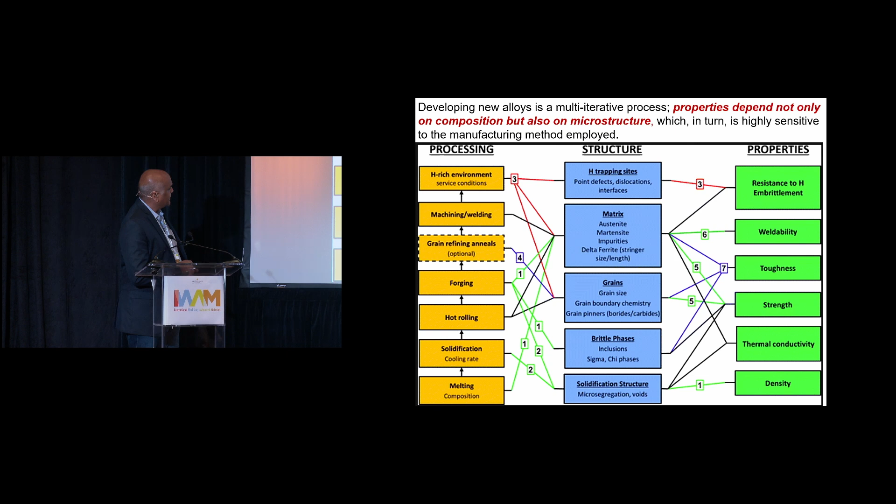For most of the engineering structures, mechanical performance is generally the key indicator when you design a car, aeroplane, a rocket, a nuclear reactor. And they depend on this microstructure.

So as metallurgical engineers, we want to play God with the microstructure. We want to be able to determine what kind of microstructures come, because microstructure is what determines the properties, and the processing routes essentially determine the microstructure. This is something that, as a background, you have to remember.

Now this is where it gets complicated. So I just talked about processing, structure, and properties. And often it's not just one property - you are talking about strength, toughness, weldability, corrosion resistance, etc. And density, and the most important of all, availability and cost.

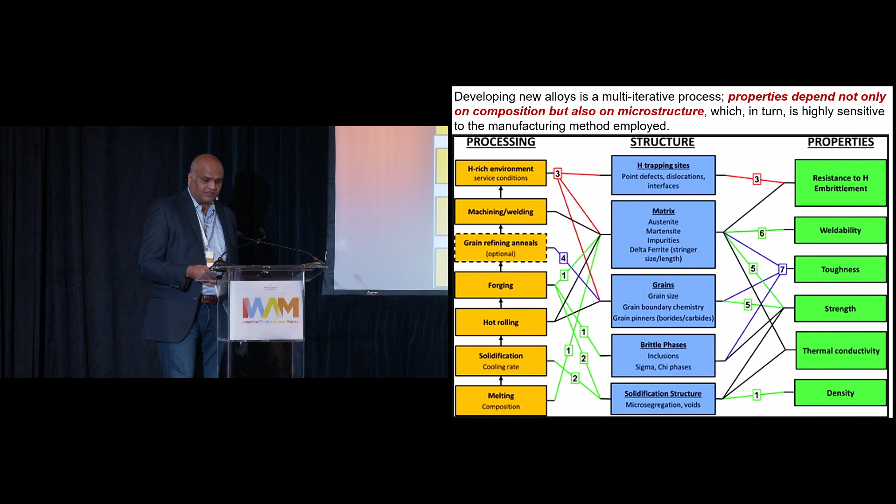So you change a little bit in the processing conditions, and the microstructural features can change dramatically, as these things show, and as a result properties change. So unless you have a very good understanding of all these connections, you can't really have an engineering alloy that is useful for you in the truest sense of the word.

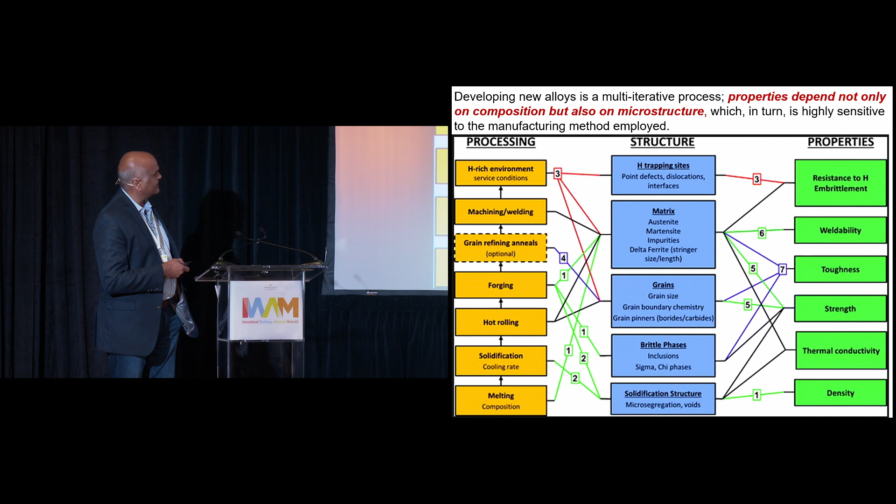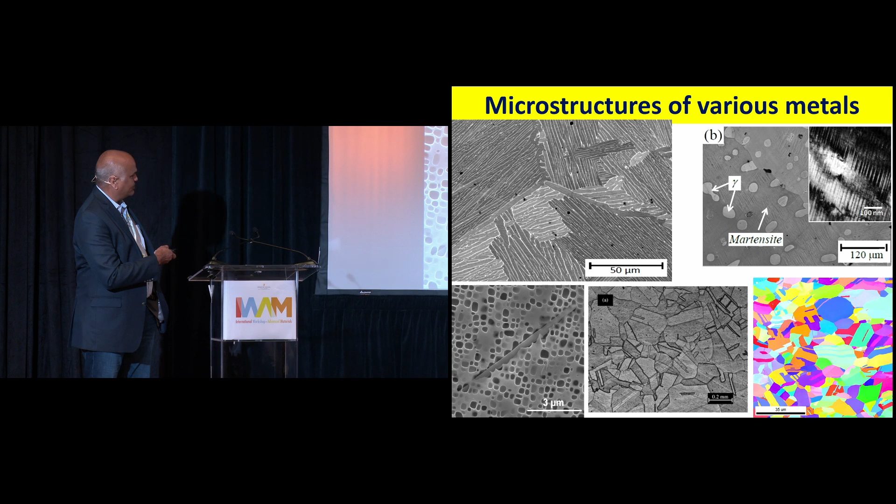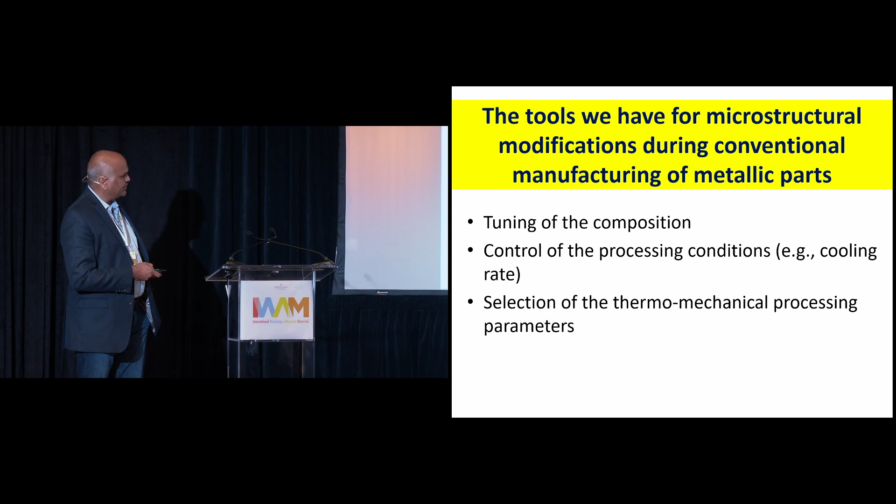And then the most common way is basically what metallurgy is all said and done - heat and beat technology, from 3,000 or 4,000 years. We heat the metal and we beat it to get the shape. So thermomechanical processing is one way to control the microstructure, and that allows us to...

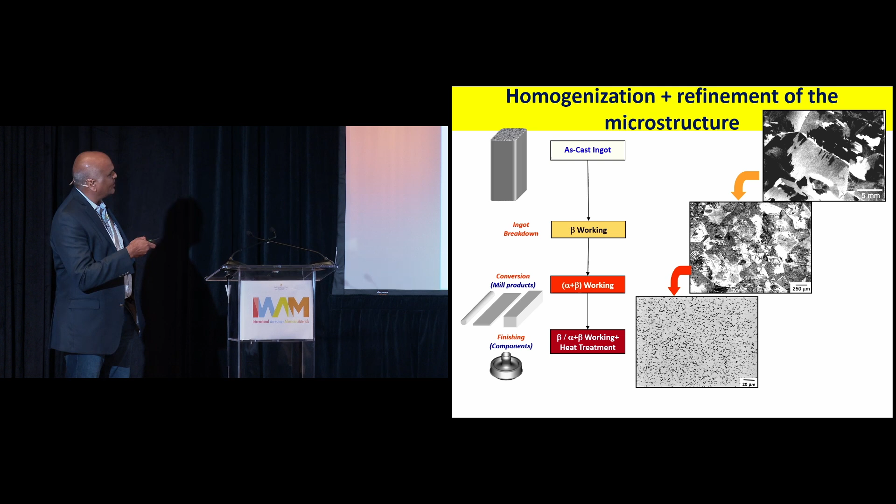...refine the microstructure. So this is a 5 millimeter scale, and this is a 20 micron scale. You can see that as you go through the thermomechanical processing for a titanium alloy, you can actually refine the microstructure and homogenize it. This is something to remember.

Now, so that's how conventional metal manufacturing works. But most people are now interested in additive manufacturing. Conventional manufacturing is you make a big casting, and reduce the size to make whatever needle or disc or whatever you want. In 3D printing of metals, we basically build bottom up - we build a voxel at a time, like nature does.

So for metal 3D printing, you basically need an energy source because metals are high melting point materials. We take typically powders or wires, and then we melt them at a specific location. These are basically powder bed fusion - you spread the powder with a predetermined thickness, 30 microns, 60 microns, and then you take a laser and shine on it to melt it.

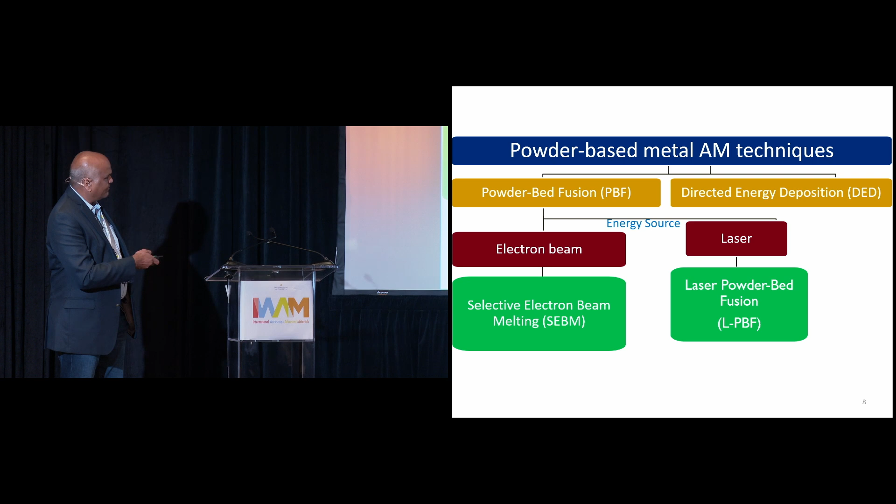There is another method called directed energy deposition. Most of the talk, we deal with a number of different 3D printing techniques, but most of my talk will be on this laser powder bed fusion technique.

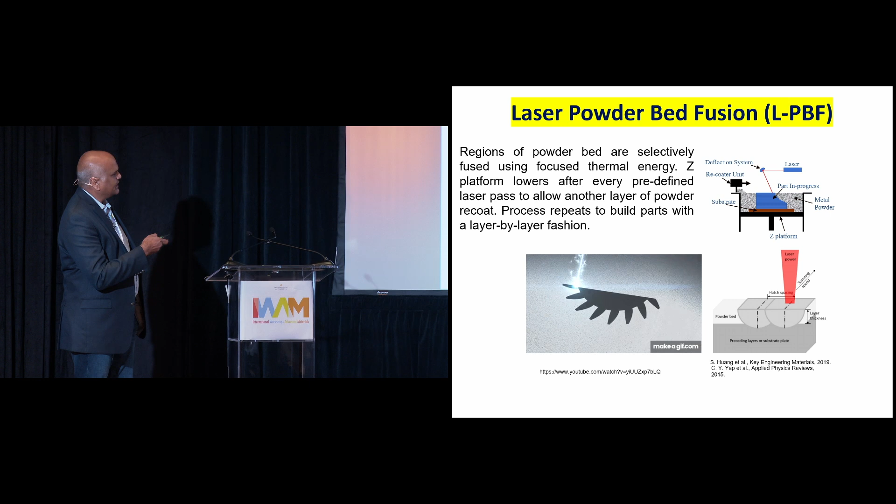Here it is very quickly. So what you do is you basically spread a layer of powder, then shine a laser on it to melt wherever your specific locations, and you keep building from bottom up to get the 3D product you want. The physics of this problem is quite complex. You have all three heat transfer mechanisms operational, and then you have phase changes - not like my previous speaker talked about, from amorphous to crystalline, but melting to solidification - and there is also some evaporation possible.

And because of the laser beam doing this, you also have fluid dynamics coming into play. It's quite a complex process as you melt a voxel at a time and keep moving the laser beam. The key parameters are growth rate, thermal gradient, and undercooling. That is the thing - next few slides I will walk you through.

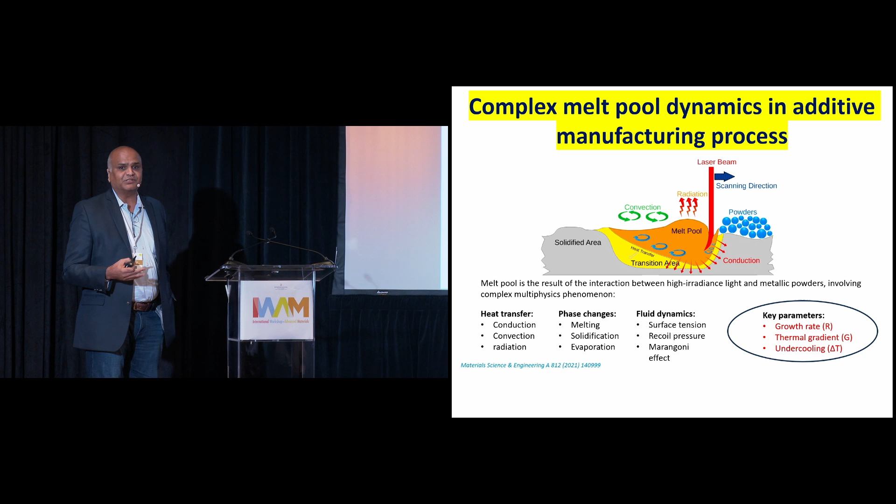I know that I'm standing between you and your lunch, so I'll try to accelerate. So the growth rate and thermal gradient directions can affect these things.

For example, here you see the very fine grains - this is a single melt, single track. But if you build on this, you can see the microstructure, the grain structure, is very fine, whereas on the outside it's much coarser. So if you build several of these layers, you see very complicated microstructures coming into play.

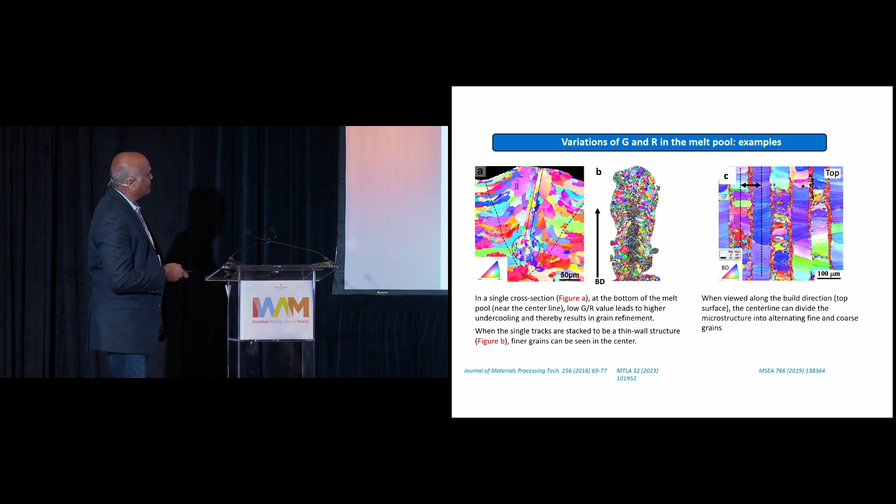When you 3D print a metallic material using the laser powder bed fusion technique, you get a hierarchical microstructure - hierarchical structure features. At the sub-micron scale you have cellular structures, and if you do TEM on it, you get very high dislocation density decorating the cell walls. From few to tens of microns, you get very complicated grain structures. At a much larger scale, you have meso-structures, often hundreds of microns in scale. So you have these features, and all of them could influence your mechanical response, and I will try to illustrate that.

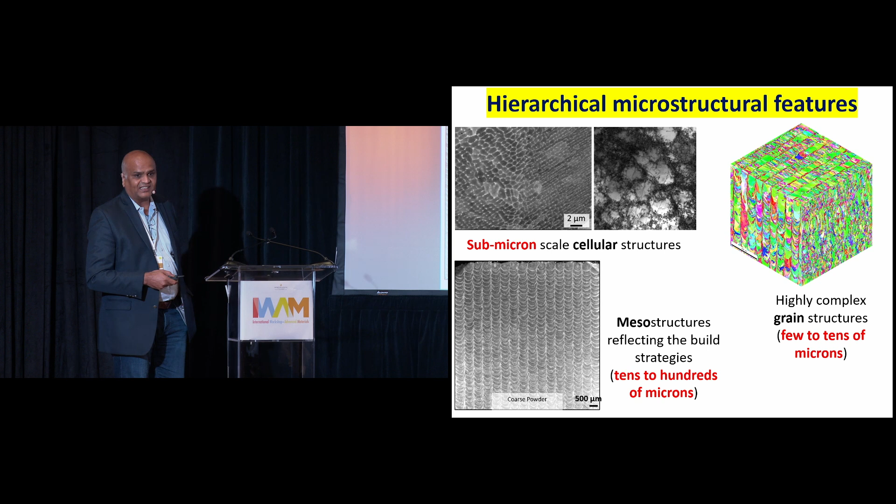One of the most common features is this cellular structure. If you look transverse to the build direction, you see these cellular structures, and if you look along the build direction, they are all aligned - the misalignment between them is very nominal. So these are basically solidification cells, and what happens is...

These are four different FCC, face-centered cubic, alloys, and you see cellular structures in all of them. But the length scales, for example depending on if you do laser powder bed fusion, are about sub-micron in scale - 0.63 microns, etc. But if you take the same austenitic stainless steel, a very common widely-used stainless steel, and use a different manufacturing technique called directed energy deposition, you get a much larger cellular structure that is now about 6 microns - an order of magnitude increase in the cellular size.

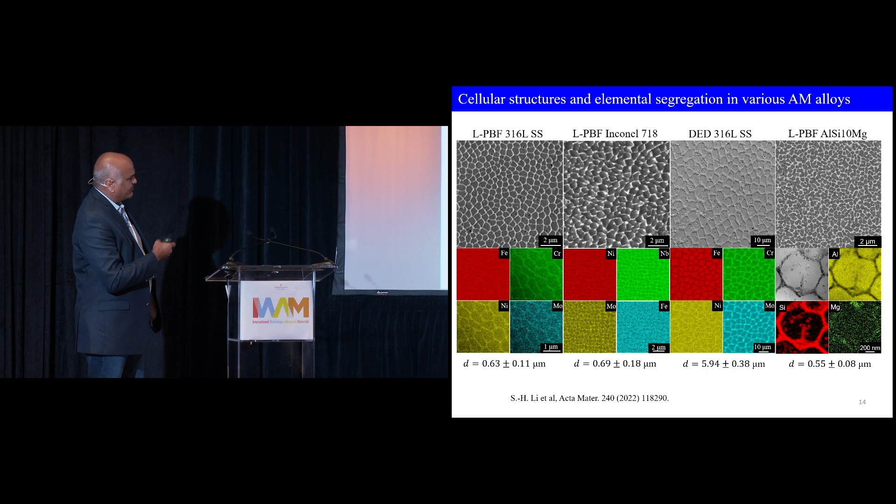There is elemental segregation, as these maps show, to the cell boundaries - solutes segregate to the boundaries. And if you zoom in and look at it in a microscope, you will see a very large dislocation density decorating these cell boundaries.

Now why does this happen? Why do you have these cell dislocations happening a lot? What you're doing is, at any given point in time, you're scanning one line, and then you come overlapping another line. So the already-solidified material undergoes a serious thermal heating and cooling, thermomechanical cycle - because it's mechanical as well, since it's already stuck to the substrate. And then you come and deposit another layer.

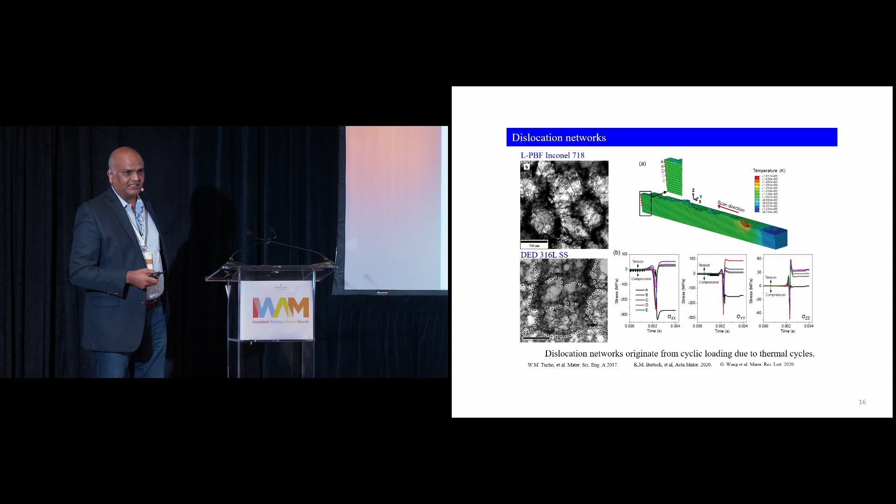In conventional manufactured metal this doesn't happen - it's all cooled at the same time. Here, you're repeatedly heating and cooling it, and because of that there is quite a lot of stretching and contraction. It's like fatigue - not conventional fatigue that you think of. As a result, these simulations show fairly substantial thermal cycles, so you get fairly large dislocation debris accumulating, and these dislocations decorate the cell walls.

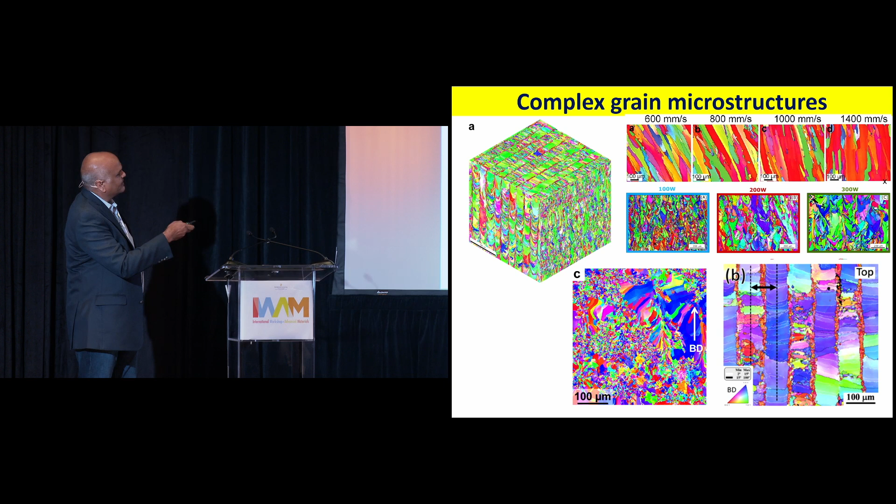Okay, now that is about the cell structure, and if you zoom out to a slightly different, larger scale, you see very complex microstructures. These are difficult to understand. I showed you earlier a structure like this. Depending on your scanning rate, you can see the grains tilting more into vertical direction, depending on the power you use. These are not easy to interpret, even for metallurgists well versed with this. You can see these kinds of structures where the grains seem completely inhomogeneous.

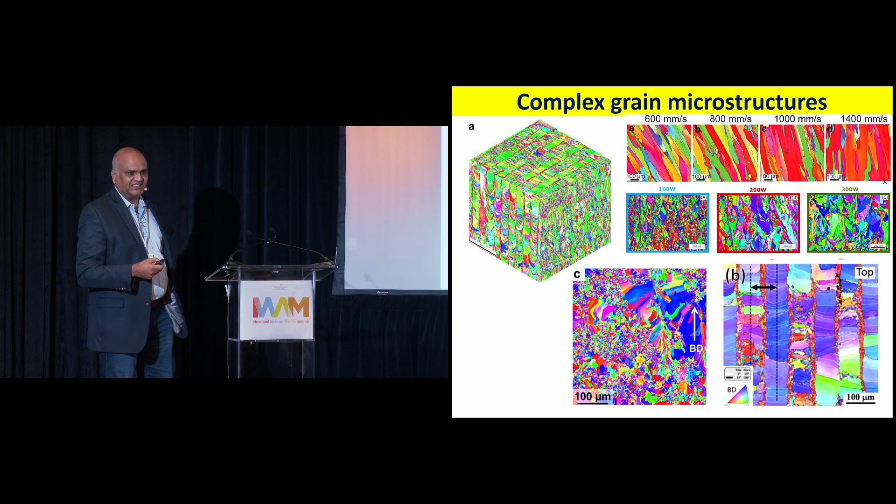At least you can see that there are a lot of, for example, if you add particles to this powder, we add nucleation things like carbides and ceramic particles, then you can actually force what we call columnar to equiaxed transition. Let me illustrate that with this particular example.

This is where we take iron and add aluminum to it. Our idea was that aluminum is lighter, so we want lighter steels. If you take pure iron, this shows all 001 orientation, all red, meaning highly textured grains. As you add more aluminum, you are essentially forcing columnar to equiaxed transition and finer grain size. So these are the things that are possible.

The last one, this is not our work, I think it's from colleagues in Australia. If you switch on ultrasound, you get very fine grains, but when you switch it off, it again gets into a coarse structure.

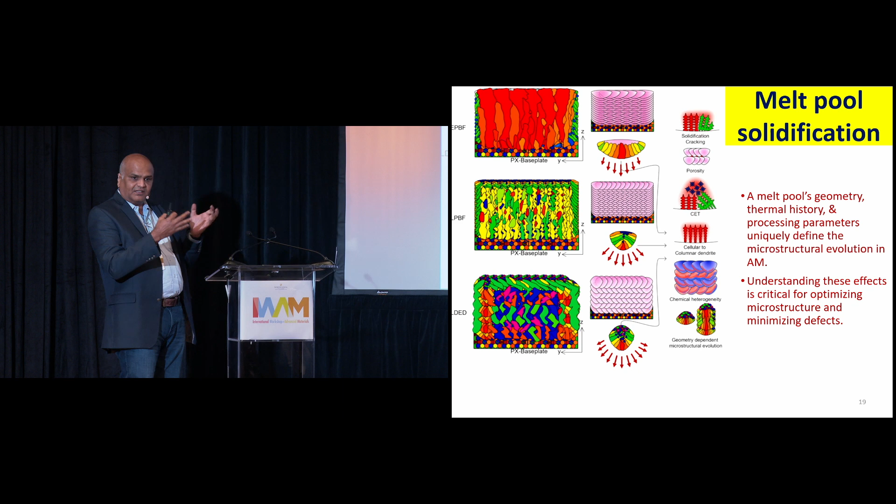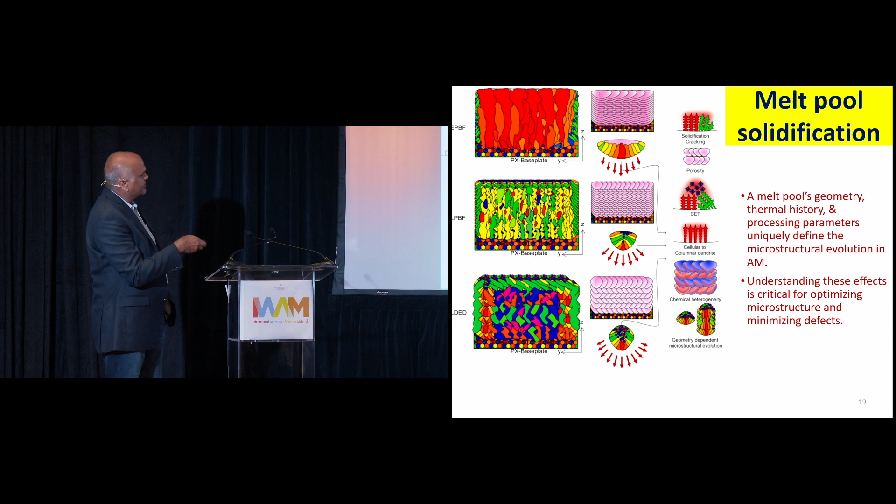So the melt pool, at any given instance, determines the solidification characteristics, which determine the kind of microstructure you get, as illustrated with these examples. Whether it's a shallow one, as in electron beam powder bed fusion, versus LPBF where it's not so shallow, and DED which is much larger scale, it changes the microstructural characteristics. We just wrote a nice review on this very topic.

That just tells you the kind of microstructures that are possible. There are submicron scale, micron scale, and mesoscale microstructural features, and they all will obviously influence the mechanical properties.

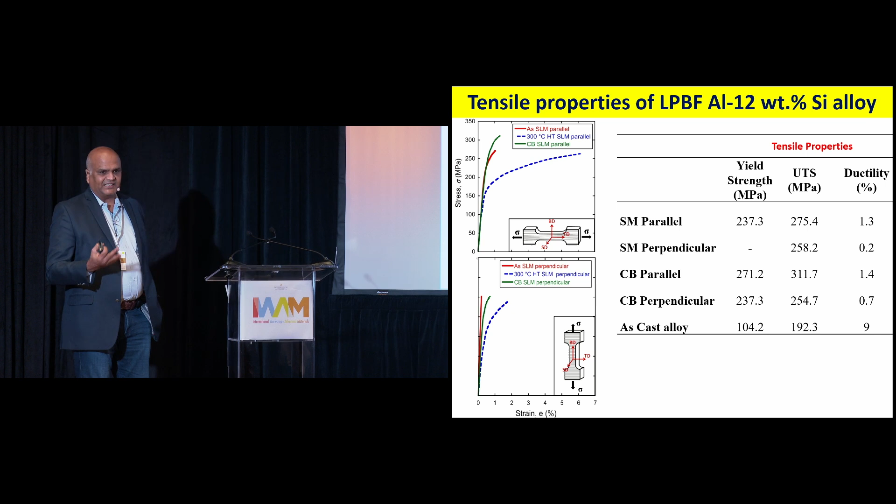So we take one of these alloys. If you look at car engines, most of these are aluminum-silicon alloys near eutectic composition. If you take this alloy and just use casting, the yield strength will be about 100 MPa, tensile strength about 200 MPa, with reasonable ductility of about 10%. The same alloy, if you make powder and 3D print it using laser powder bed fusion, you'll notice the strength has more than doubled, from 100 to 200 plus. The UTS has also gone up, but the ductility has really tanked, gone very, very bad. So the strength goes up when you 3D print an alloy, but the ductility comes down.

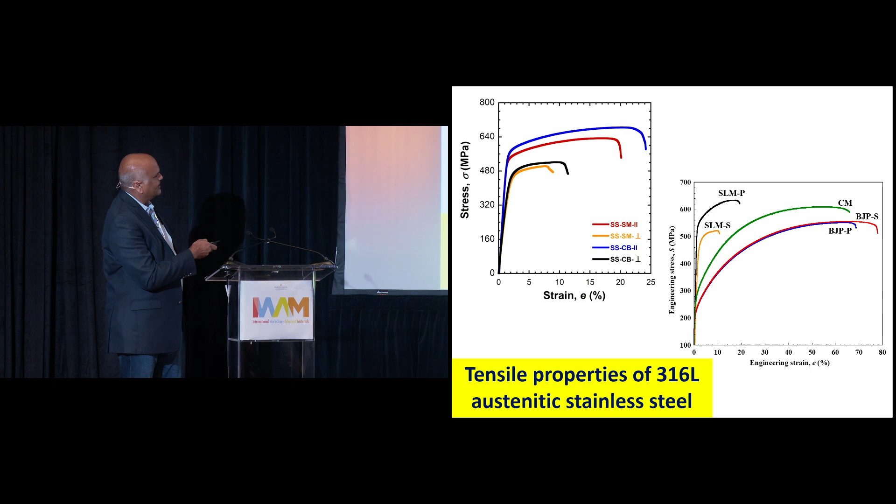That's the thing — this is also true for 316L, an austenitic stainless steel. This conventionally manufactured alloy is fairly ductile, but if you do laser powder bed fusion, the strength increases while ductility decreases. This is a general observation for most 3D printed alloys compared to their conventionally manufactured counterparts: strength goes up, ductility decreases.

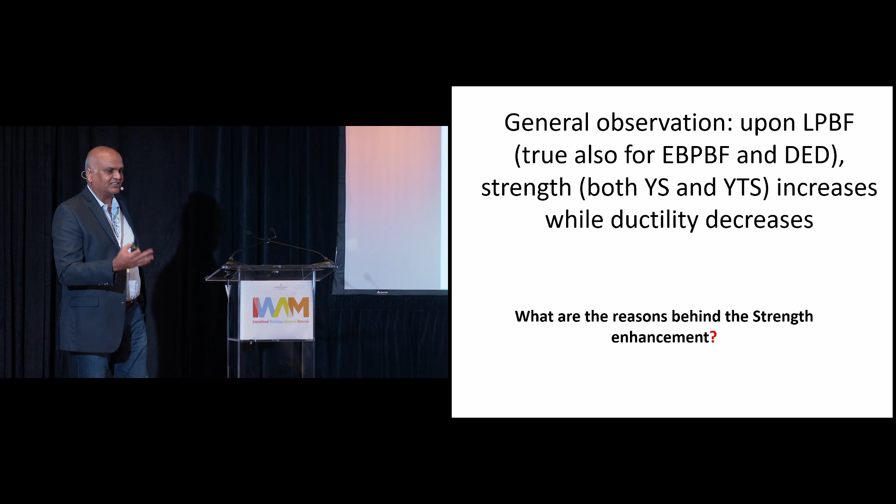What are the reasons behind this? I already talked about the cellular structure. So one can say the length scale that determines the yield strength in the material is no longer the grain size, but the cell size.

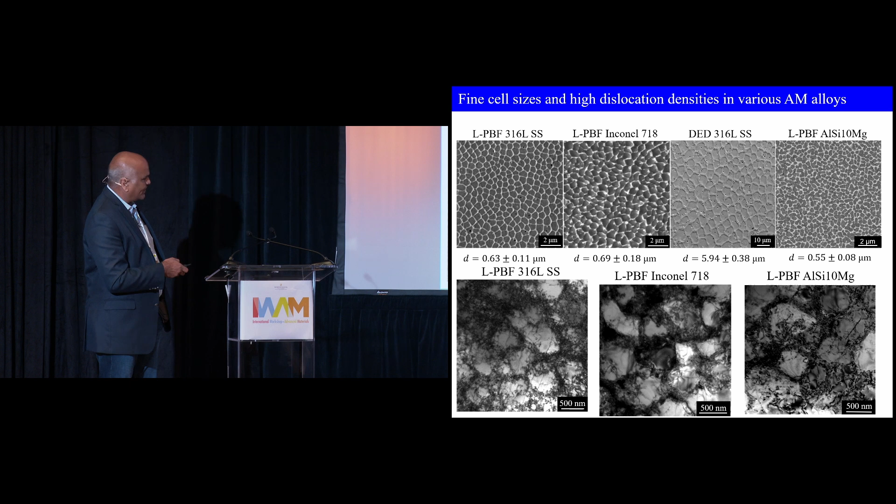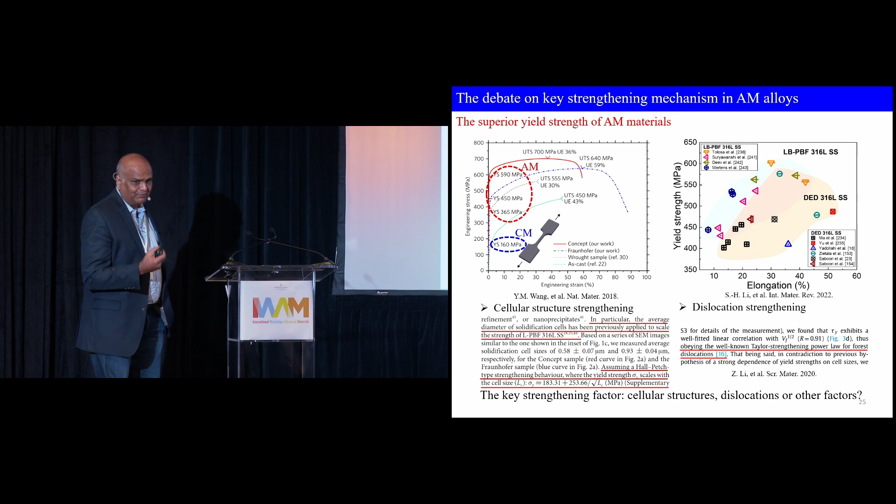And you have also a large number of dislocations, right? So there are two theories or hypotheses. One says, okay, because you have this Hall-Petch relationship. Any of you who studied material science, Callister's book, this is the first thing you learn. The finer the grain size, the higher the strength, because the grain boundaries act as barriers for dislocation motion. They do other things, as Stephen showed, but here also, in terms of strength, they are very critical.

So this is the grain Hall-Petch relationship here, and Wang et al. say that instead of the grain size, you fit in the cellular size. The other school of thought says, no, you have a very large number of dislocations, and dislocations are the ones which basically hinder plasticity, and that's why you get the high strength.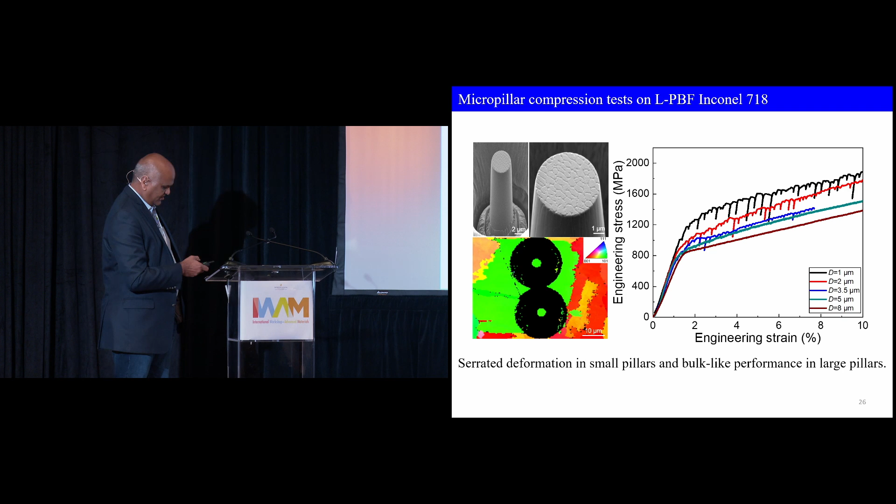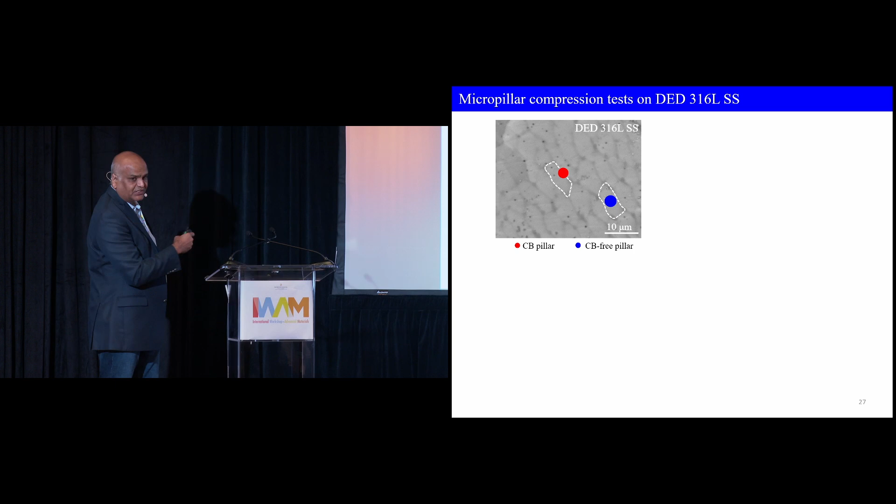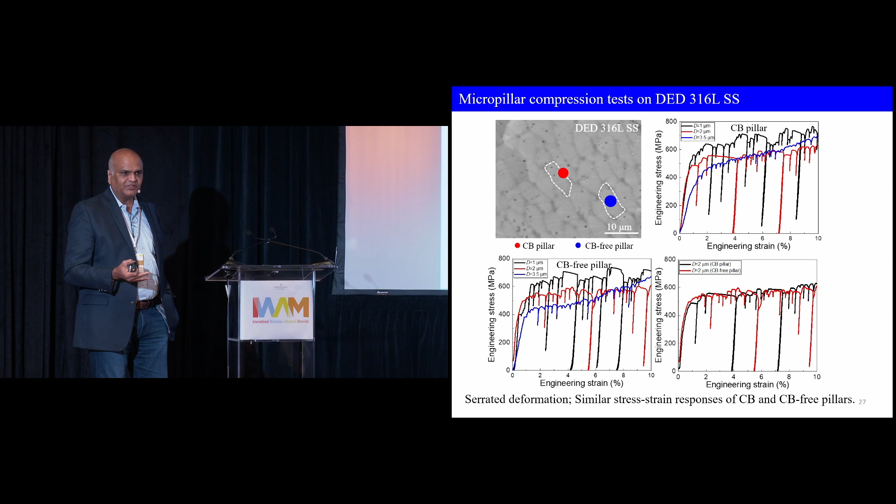We could actually machine out pillars with or without the cellular structure, because in the directed energy deposition case, we have a fairly large cell size. We can have a pillar with a cell boundary in between, or a pillar without any boundary. So we can have a direct comparison, and here is the comparison, the last one. They're both 2 micron pillars, and there is no difference. So whether you have a cell boundary or not doesn't seem to be affecting the property.

And we did it for aluminum silicon as well. I skipped this - in this case, there is no size effect, no smaller-is-stronger response.

So we did this for a lot of different materials, and this is a summary plot, if you will. Here, what we do is we take the yield strength that we measure. For those of you who are not familiar, yield strength is when we have the elastic to plastic transition, the stress required to initiate plastic deformation in a metal.

Now, we normalize that with the bulk value, taking a very large specimen and measuring that. On this axis, we normalize the pillar diameter - capital D is the pillar diameter - with the cell or grain size. If you have conventionally manufactured metals, microcrystalline or nanocrystalline, what you will see is that as the pillar diameter gets smaller and smaller, it gets weaker. Smaller is weaker. But in 3D printed metals, it's smaller is stronger. You can see in all of the cases, it's mostly smaller is stronger, okay?

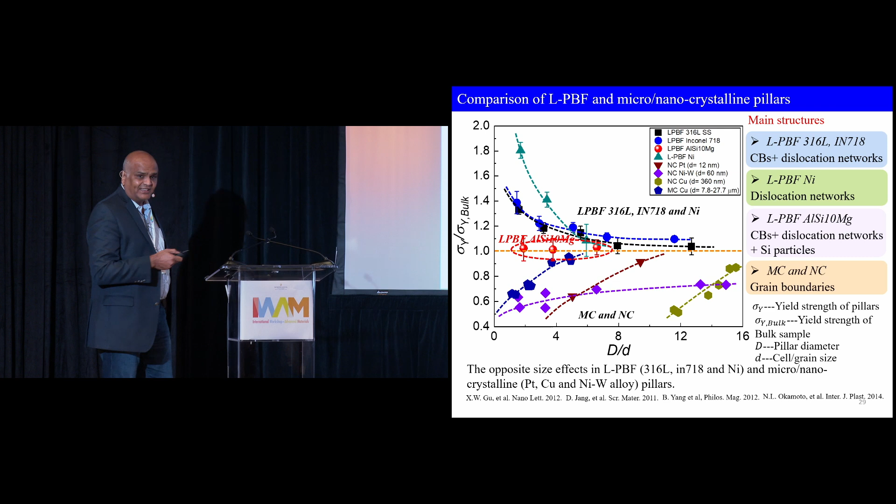So why does this happen, okay? I actually put this slide after listening to our chair's talk the other day. F.C. Frank is what he mentioned. He was at Bristol physics department.

First thing to understand is how dislocations multiply. They do multiply dramatically. If you take a well-grown metallic crystal and you squeeze it a bit, deform it, they go up by 6 orders of magnitude. Dislocations multiply, and very early on, condensed matter physicists wondered why this happened.

So Frank came up - this is a fascinating story itself - that Frank and Read came up with this idea on the same day, roughly the same time, in different places. Check out the Wikipedia rabbit hole on this, it's very fascinating. They met the next week and then decided to write a paper together.

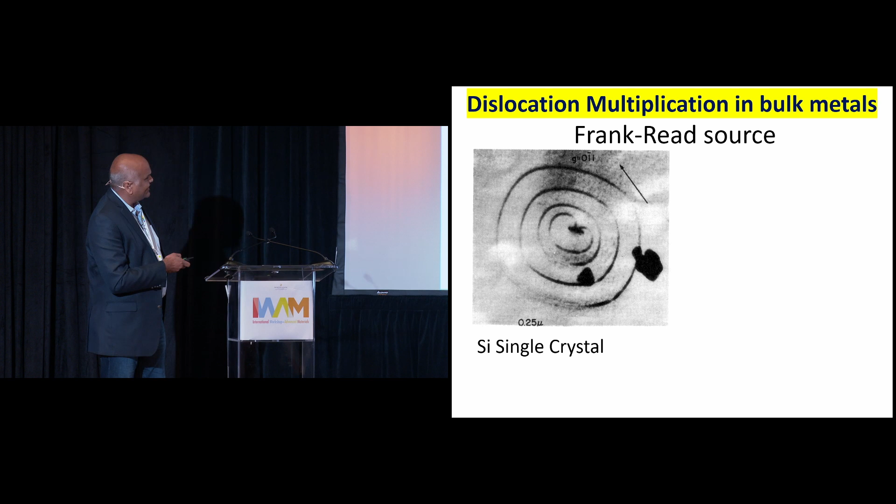So the Frank-Read source basically is: if you have a dislocation line like this, if it's pinned on 2 ends - or it doesn't need to be pinned, but it can have only shear stress on this particular segment - what happens is once you apply stress, it bows out, and after a while it becomes unstable and punches out a dislocation. And this is what you can actually see in this demonstration, right?

So those from Cambridge, materials department, will recognize this with the DoITPoMS thing. Bill Clyne started it.

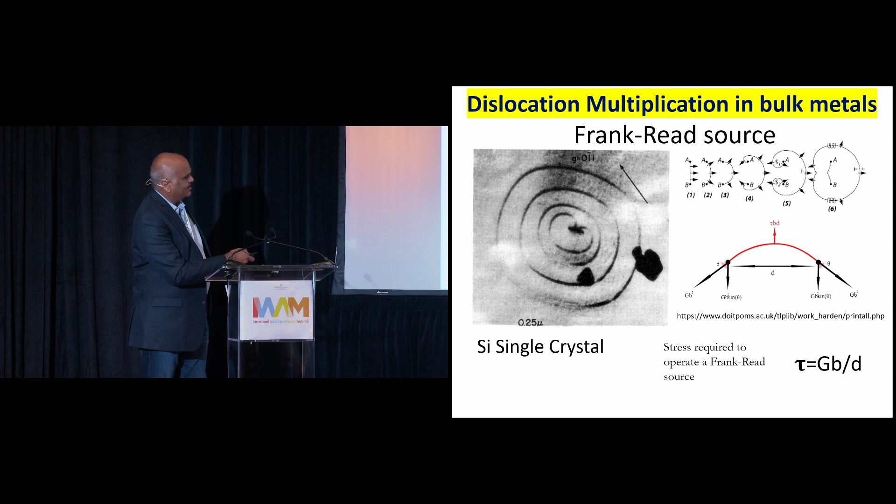So the stress required to operate a Frank-Read source basically inversely scales with the distance, the length of it, Gb by d. Now, so what happens when you go to smaller and smaller diameter pillars is that it's not the full length, so you have what we call single arm sources. This is anchored at the surface - the single arm source, whereas this is the Frank-Read source. So when the average length of the Frank-Read source is much smaller, you need to apply higher stress for them to get active, and that's why the yield strength goes up.

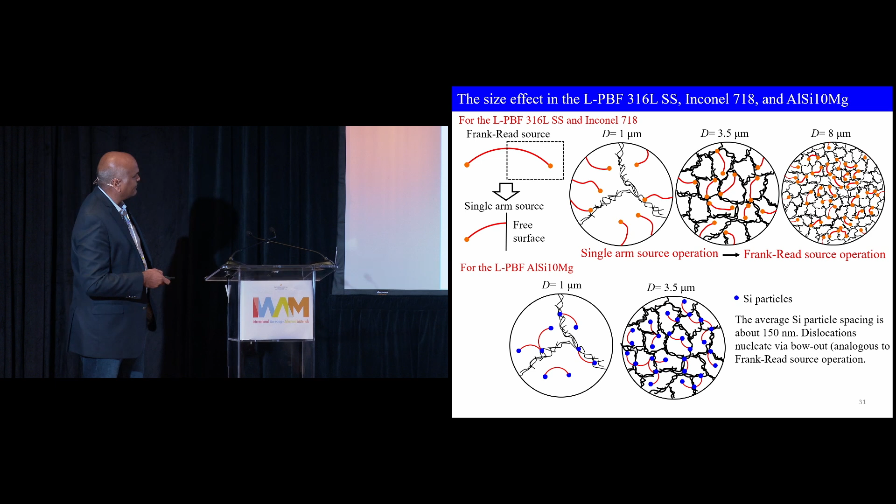So when you go to larger and larger diameter pillars, you obviously don't have these single arm sources, but the Frank-Read sources themselves become dominant, and that's why you get bulk-like properties. In the aluminum silicon case, we have particles - silicon solubility in aluminum is very negligible, so it all precipitates out as nanoparticles. That's why even if you go to 1 micron, you get the bulk strength.

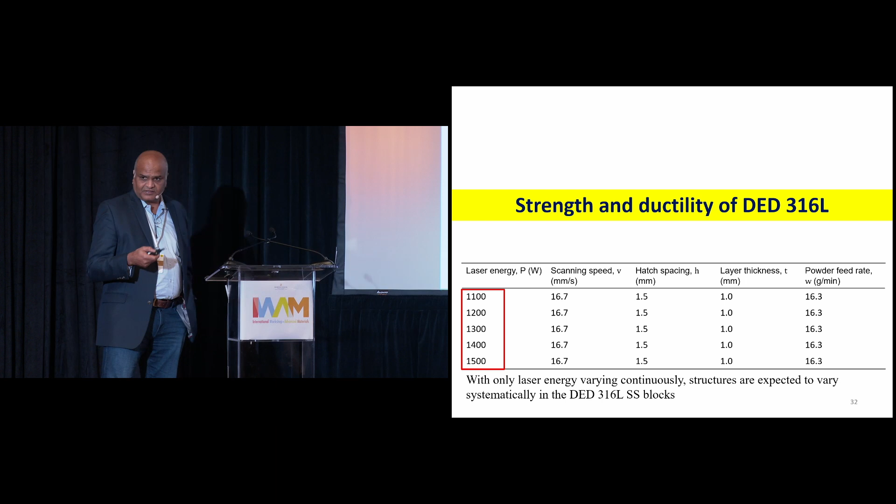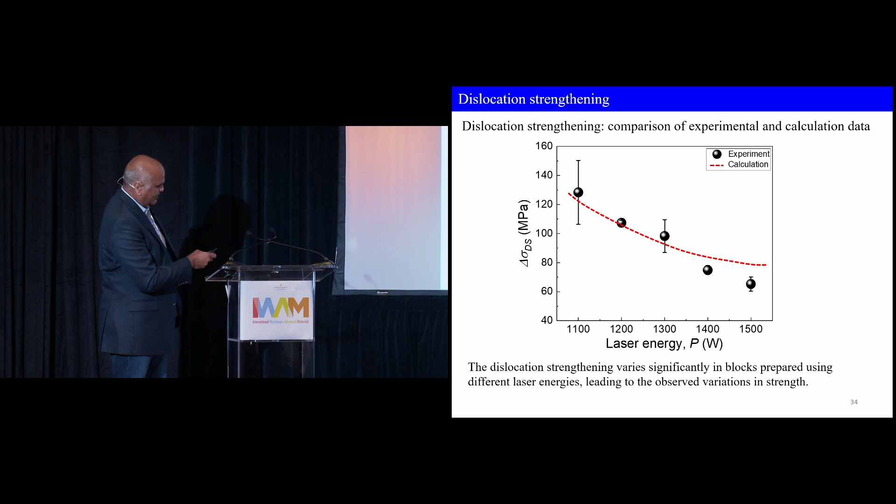Now, what is the reason that you get high strength? Not the cellular structures - we did systematic experiments where we can vary these characteristics very systematically, and what we show is that it's all because of the dislocation density. You have the cellular structures, but you also have very high dislocation density in this material, in the as-fabricated state, just because it's going through thermomechanical cycling. This is from Taylor's calculation, and we show that we know the dislocation density.

That is what I flashed in the previous slide, and we show that the additional strength actually comes from the large dislocation density. Now, early on, I summarized that when you 3D print a metal, the strength goes up. In metallic materials context, it's true that you can't have the cake and eat it too - so when your strength goes up, you have to give up something. The trade-off that you do is with ductility. So the strength goes up, ductility comes down. Why does it happen? Because of the same dislocation.

I told you that there is a large dislocation density in the material, and that increases the strength. But it's like a reservoir - metal can only accommodate so many dislocations, it can't accommodate more. Because of the way you manufactured it, you already stored a lot of dislocations, so the further number of dislocations you can add on to it is smaller. And that's why the work hardening ability - I'm sorry, it's a little more technical for this audience - but work hardening ability decreases.

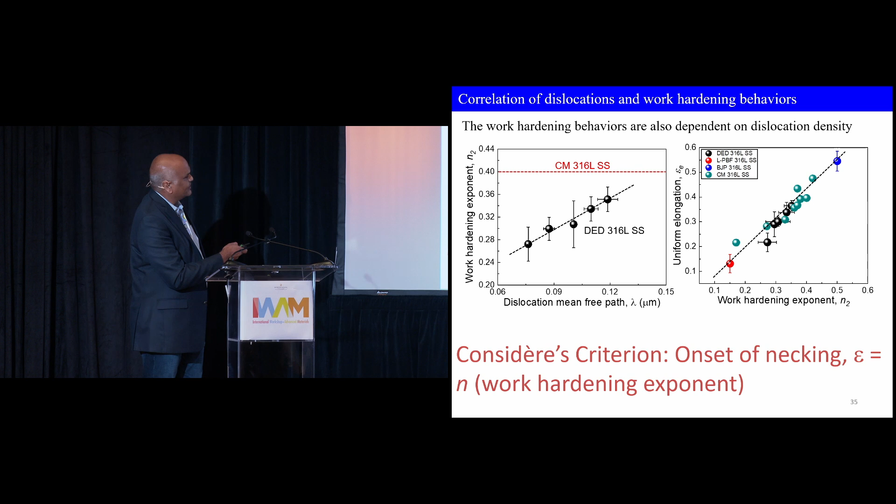This is actually a Considère's criterion that we teach. So as the work hardening exponent decreases, the uniform elongation - which is the ductility of the material - reduces. So this is what it tells you: the way you manufacture changes the whole game. The microstructures change, the dislocation densities change, and they alter both strength and ductility as we saw.

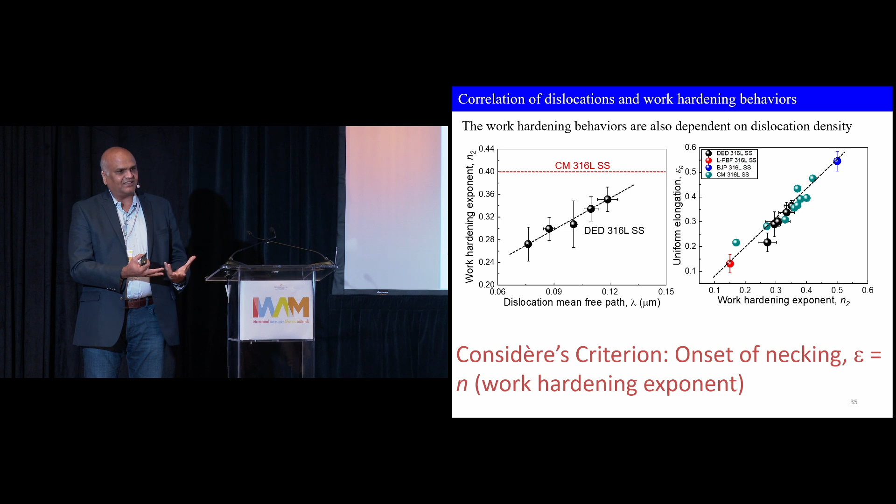Okay, move on to fracture behavior of these materials. I talked about ductility and strength trade-off - it's really the fracture toughness and strength trade-off. So you need, for an engineering application, both these characteristics to be very good, especially fracture toughness. When you design a critical component, meaning a component that should not fail - why is it critical? If you think of an aeroplane, no part of it should fail without telling you.

That's very bad news. Somebody told this: what excites scientists, pure science people, is that when they discover something unexpected - the classic case is the Eureka moment of Archimedes. What excites engineers is that everything should work as you predicted them to be. So if an aeroplane takes off in Dubai, travels 12 hours to New York, it should land safely and immediately turn back, and whatnot.

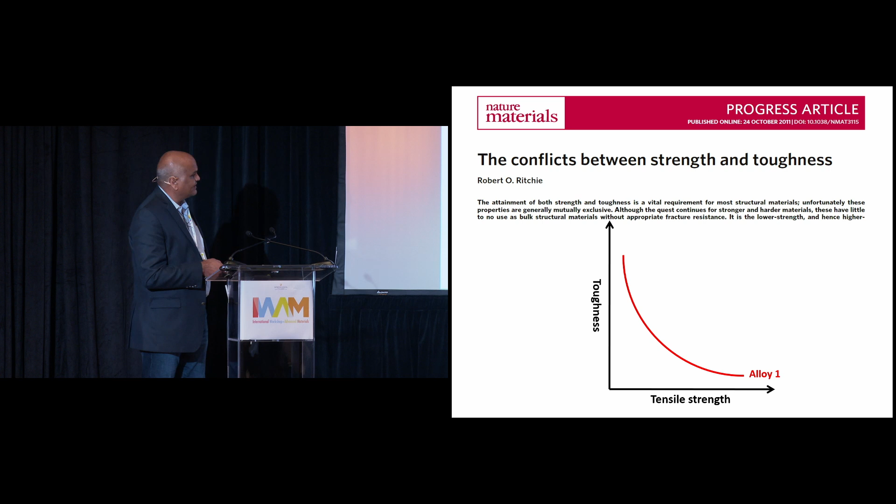So for that, engineering components should have damage tolerance. Any damage created during service should be tolerable, so that we do periodic inspections and remove them. For that, you need fracture toughness and resistance to fracture. That's why we don't use ceramic materials in structural components, because they don't have toughness. They have high strength and other properties, but unfortunately, toughness and strength go in opposite directions, as just illustrated here. Rob Ritchie wrote about this long ago.

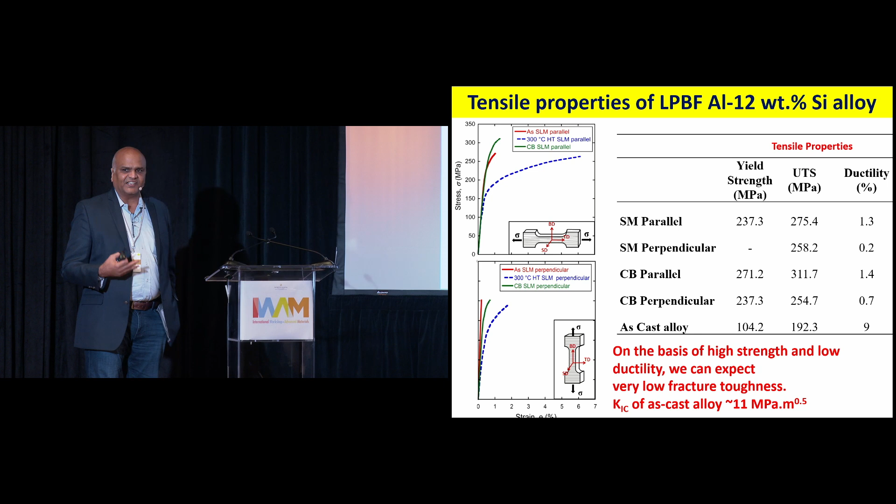All right, so remember this slide? I told you aluminum silicon, when we 3D print it, the strength goes up. And I also told you that ductility decreases, and ductility and fracture toughness are generally correlated in a linear manner. So we were expecting that fracture toughness of this alloy would be disastrous, very, very bad.

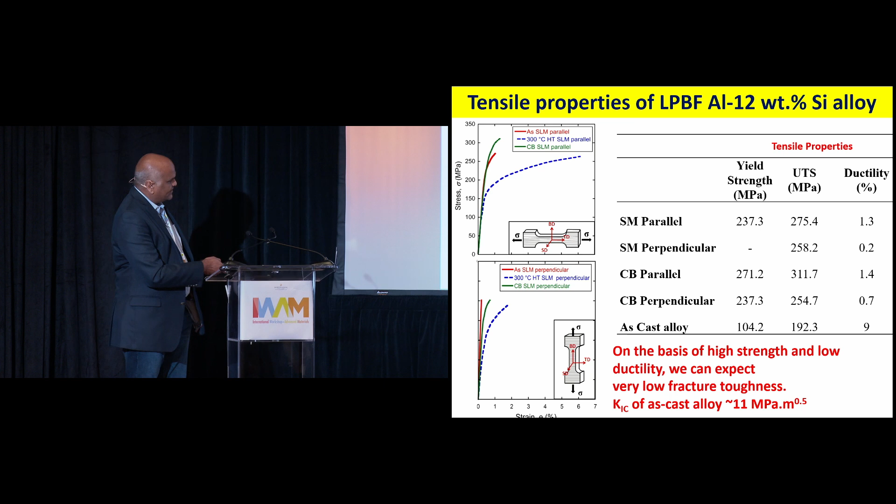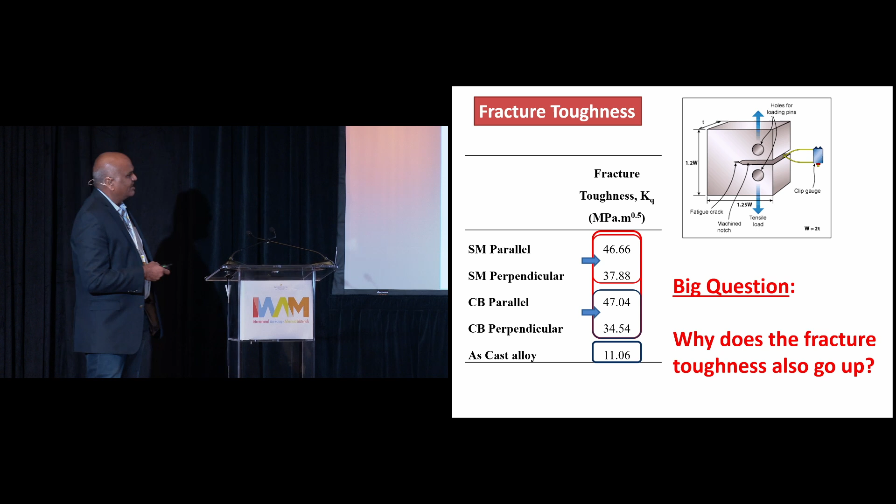For reference, the as-cast alloy fracture toughness is about 11 MPa root meters. This is a unique thing. So when we did fracture toughness measurements, we were expecting it to be much lower than 10 MPa root meters. What we found is that the fracture toughness actually did not decrease, but went up. Strength has gone up by about 100%, but the fracture toughness has gone up by 300, 400%. So these are what we call proper fracture toughness measurements, where we put a crack and measure these things.

So why does this happen? I told you that 3D printing is a bottom-up way of manufacturing materials. We basically build line by line, layer by layer.

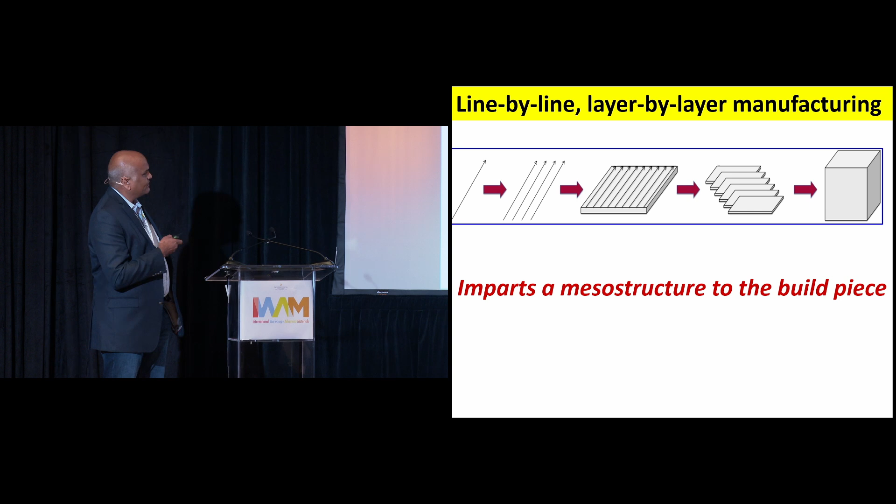And what it does is impart a meso-structure, which I also talked to you about. The strategy we use to print leaves a signature in the material. This is the signature of the way we built this. Each of these is one line, cross-section of one line, and you can see them overlapping. You rotate 73 degrees between successive layers, and you get these things.

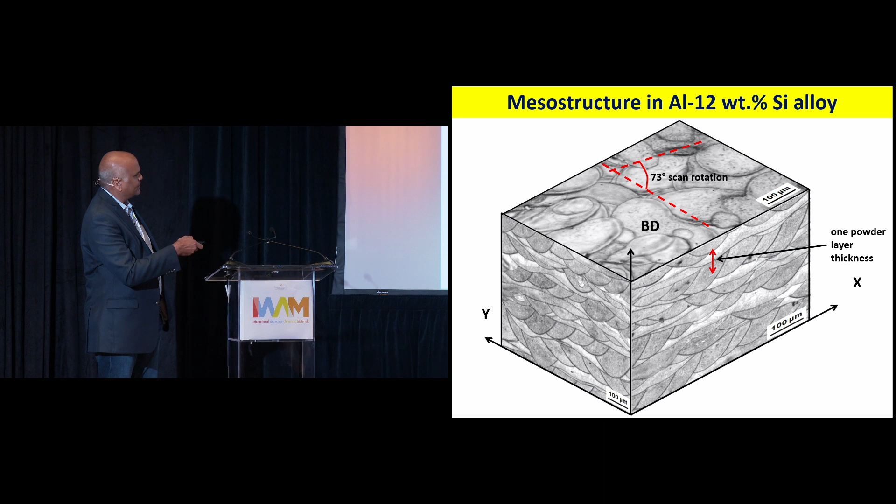So what happens is that in this particular material, because silicon's solid solubility is very low, silicon essentially decorates these hatch boundaries. So for example, you can see these boundaries. If you magnify it, silicon is rich, they become silicon rich.

So what happens is, if a crack comes along, it sees silicon is brittle, so it thinks, okay, I have an easier path, and it dives. Then it goes away from what we call the mode 1 direction. So it has to go straight this way, but instead it just goes down. Coming back up is a much more energy-intensive process.

So think of it, those of you who run or bicycle: if it is flat land, starting from the same altitude, running or biking 10 kilometers, that's the kind of energy you have to spend. For the same distance, same start and end altitude, but if it is highly corrugated, a highly tortuous path, you'll have to spend a lot more energy. Going down is easy, but coming up is much more difficult. It's exactly the same story here.

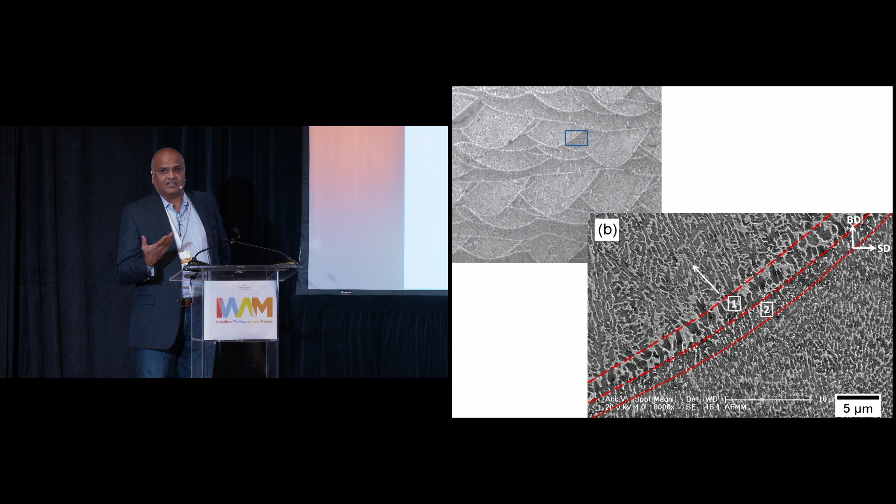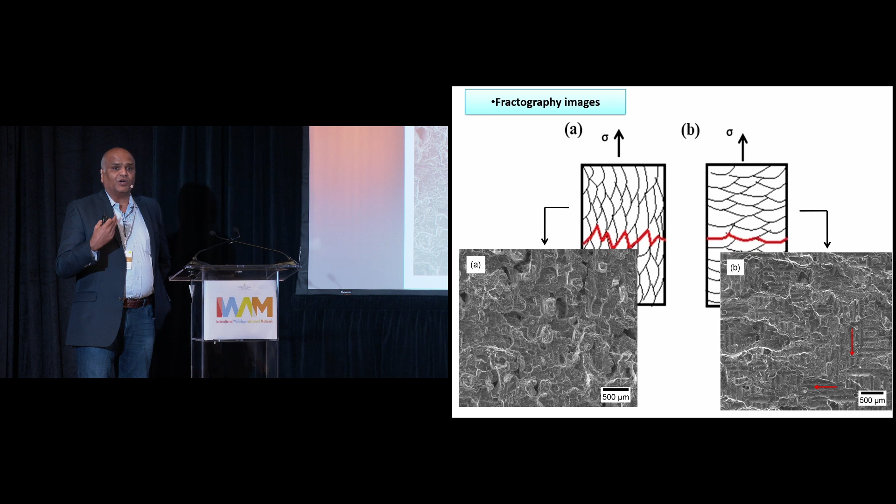And it's actually more three-dimensional in nature. These are just schematic illustrations. So the cracks get deflected, and this crack tip tortuosity, a tortuous path in 3 dimensions, as these fractographs illustrate, is what causes the fracture toughness to go up a lot. So the strength goes up because of microstructural reasons, high dislocation densities, etc., whereas the toughness improvement comes about because of the meso-structural features.

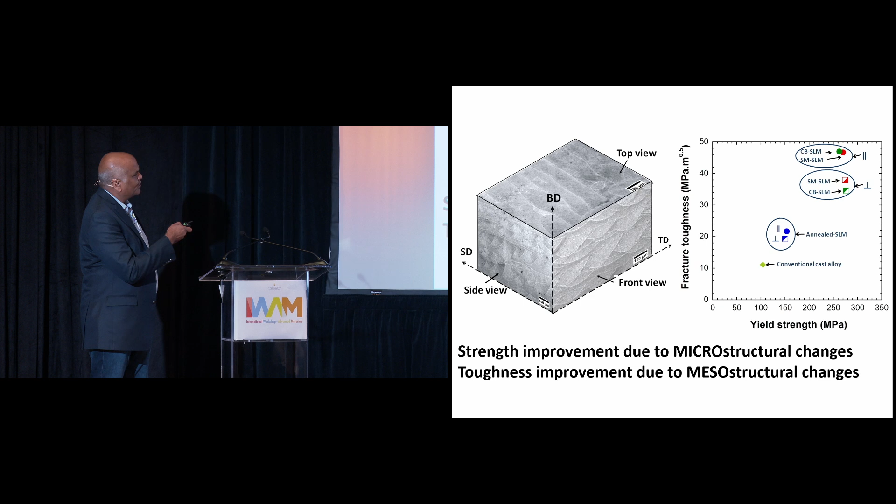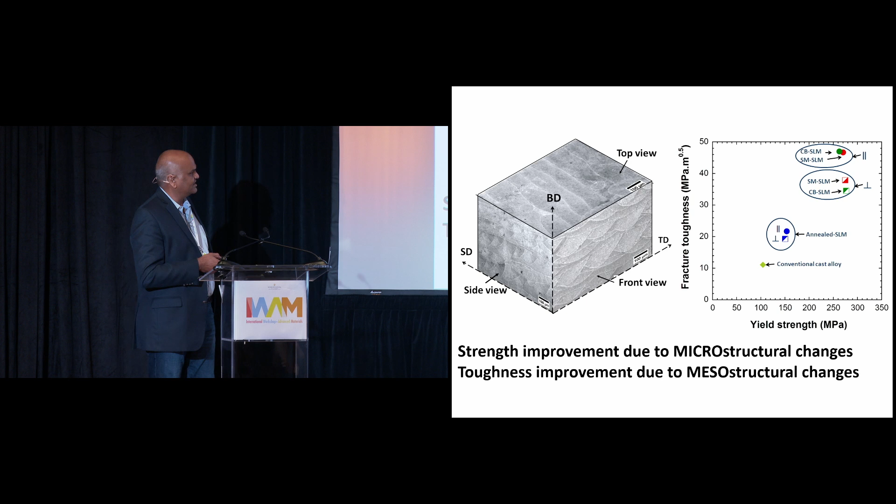So if you again look at the fracture toughness versus yield strength plot, the expectation is to go like this, but we are actually able to push the other way around because of the way you manufacture these things and the signatures they leave. So how do we control the meso-structures? Next question is, if they improve the fracture toughness.

For example, depending on the powders, if you use fine powders versus coarse powders, the scale is similar, but you can see these are much coarser powders. The meso-structure is hard to see here, whereas you can see it very clearly here. This is a mixture of fine and coarse powders, and even the grain features are very different in these materials.

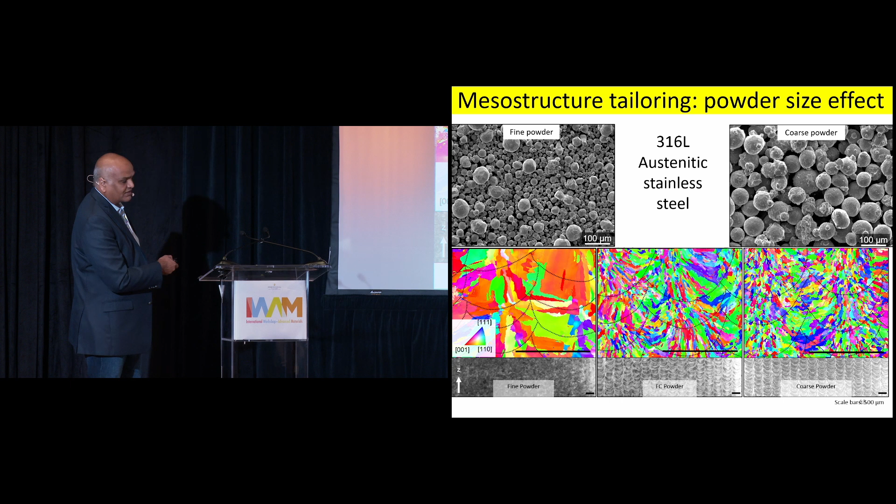Now, in fact, my former postdoc worked on this, and we published a paper in Nature Communications on this.

So, for example, if you polish this 3D printed piece of metal, you can't see this. But if you etch it, because of the different grain structures, you can see these things by varying parameters. So you can essentially, as I told you earlier, play around with the microstructures. We want to be able to do whatever we want, and this is one way.

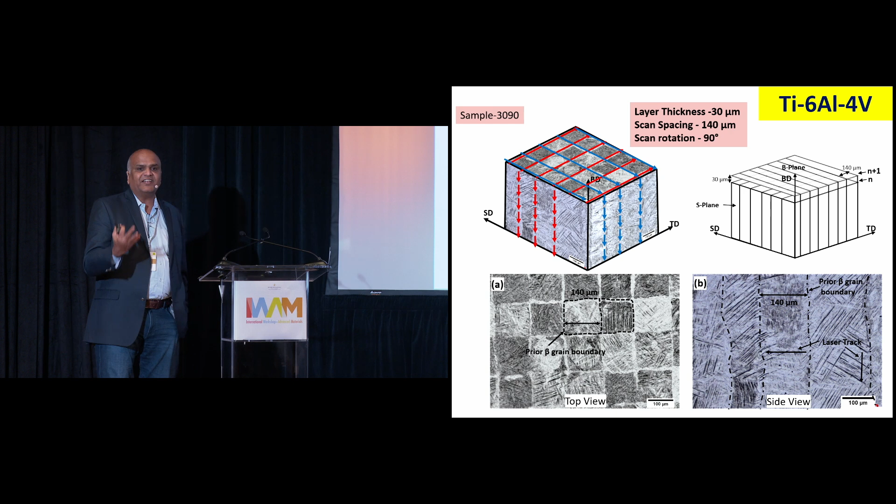If you take titanium 6, aluminum 4, vanadium, this is a very important alloy. In aeroplanes, the front, these big blades are made of Ti-6-4. So if you use a 30 micron layer thickness and a scan rotation of 90 degrees between layers, you get these square grains on the top surface, and on the side, these are all columnar. So epitaxial growth actually exists because the layer thickness is smaller.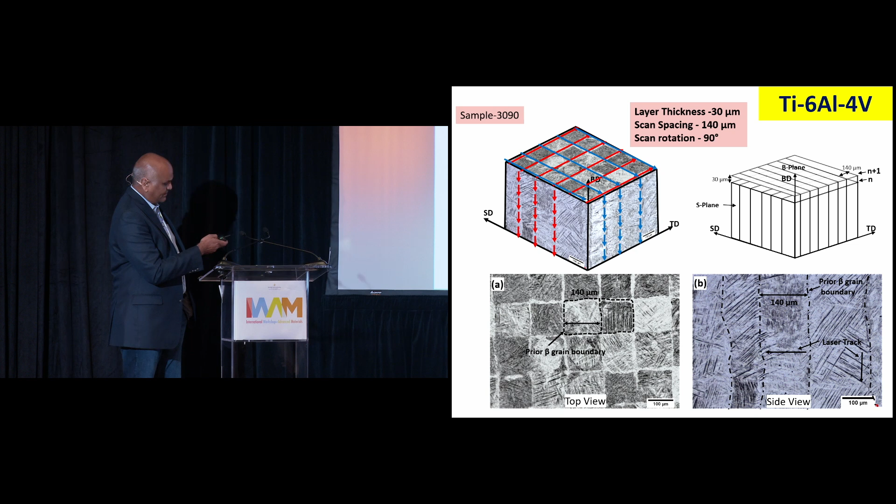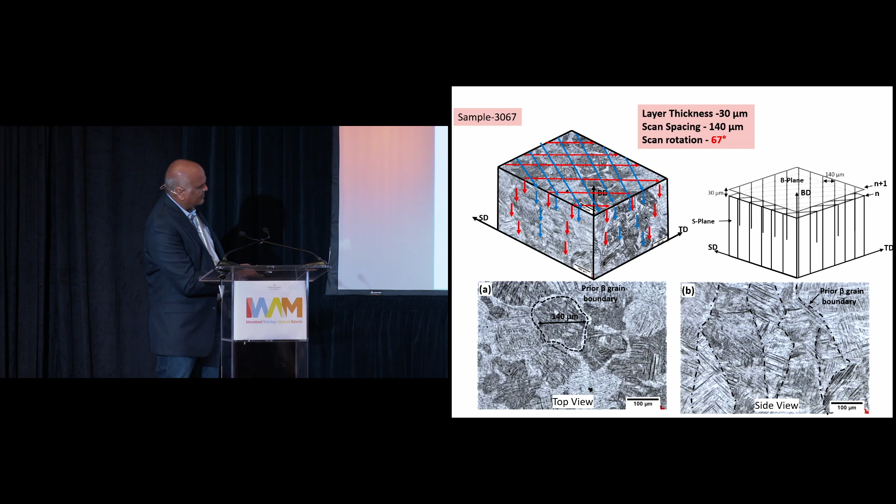Now, if you change this from 30 microns, you still keep it, but change to a 67-degree rotation between successive layers. On the top, you break the square grains, but on the side also, columnar grains are broken, but still the grains are oriented in one way.

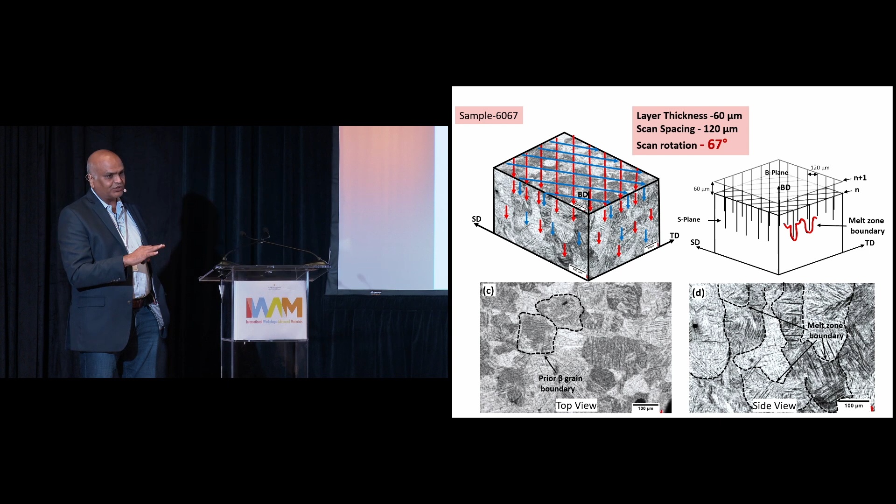Now, if you increase the layer thickness to 60 microns and do the scan rotation at 67 degrees, you will be able to break these square grains and columnar grains. So, the alloy is the same, we didn't change the composition. We can also change the composition and do these things, but by playing around with the print strategies, process parameters if you will, you can essentially get the meso-structure that you want.

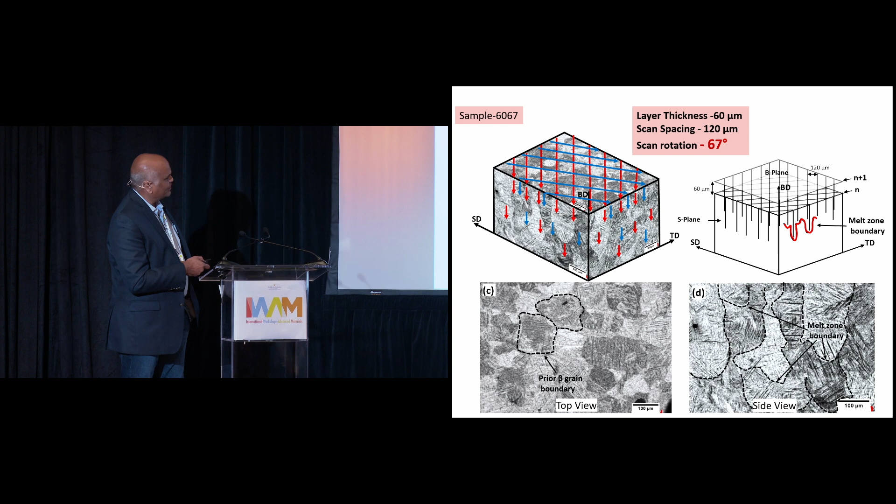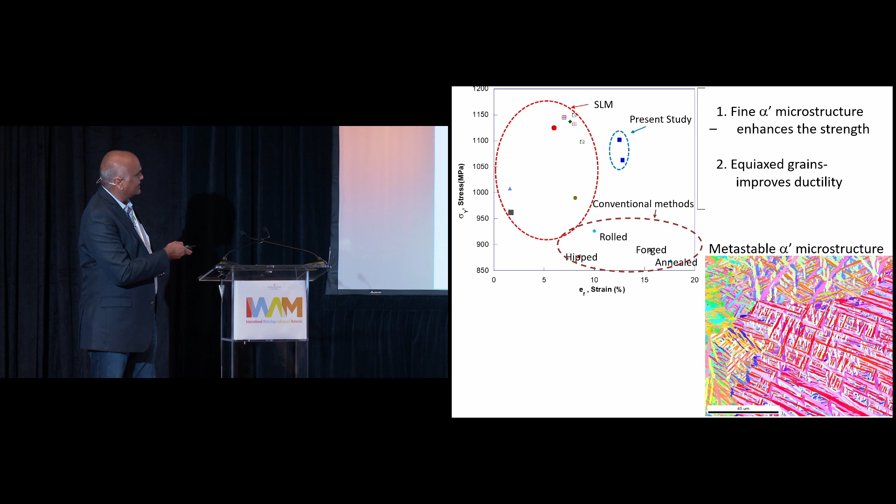We measure the mechanical properties. In this case, one of the other things that happens is because at any given instance of time, you're melting a very small voxel of material, and it is sitting on a huge plate, rapid solidification conditions prevail, and you get a martensitic metastable alpha prime microstructure here, and that essentially gives this material very high strength.

And now I have 3.3 minutes left, and I'll talk about high entropy alloys. So, what are high entropy alloys? Basically, Brian Cantor and others came up with this idea.

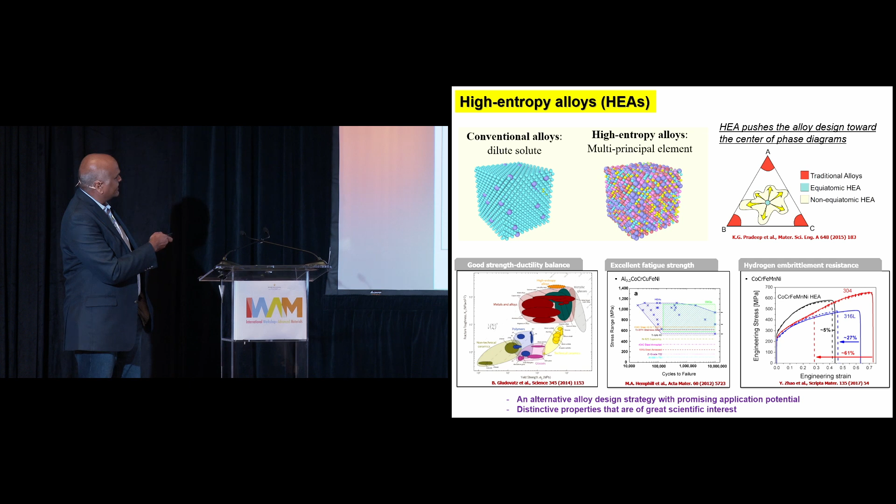I talked about 316L and whatnot, where we add a specific amount of chromium for corrosion resistance, a specific amount of nickel to keep austenite, etc. So we previously used to play around with the ends if you take a ternary alloy system. Now, why not go to the center of it? That is the kind of idea. And these alloys seem to have caught the fascination of the whole metallurgical community because they have a lot of interesting mechanical properties, including good strength-ductility balance, and in terms of hydrogen embrittlement resistance, they seem to be very good.

So these alloys, this is not our work, this is Rob Ritchie's work, seem to have world record numbers for fracture toughness. You can see here, the fracture toughness values are 500 MPa root meters, especially at very low temperatures. Steels will have maybe not even 100. So this is like 500 MPa root meters, very, very large. And that's how they got into Nature kind of papers.

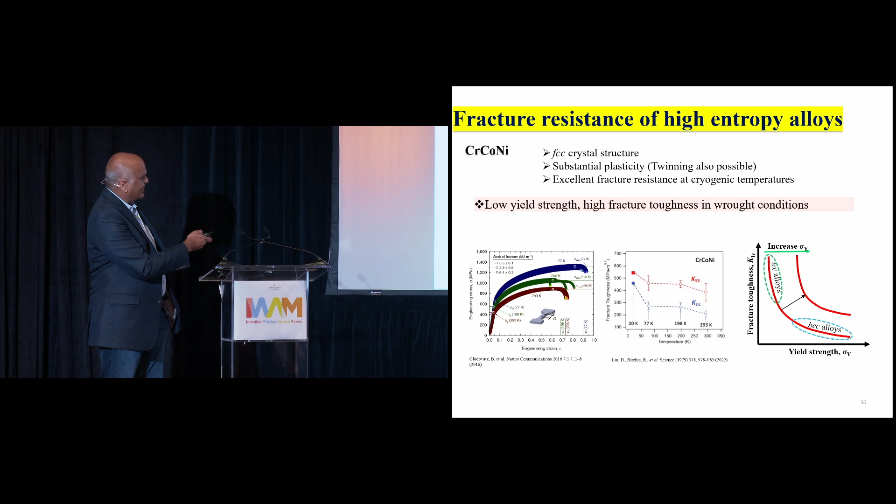So FCC-based ones have the issue that they don't have much strength, but very high fracture toughness values. When you 3D print these metals, the strength again goes up. This is a cobalt, chromium, nickel alloy in equal amounts. The strength goes up, whether you do the testing at 293 or 77 Kelvin, and this happens because you have twinning and other mechanisms coming into play.

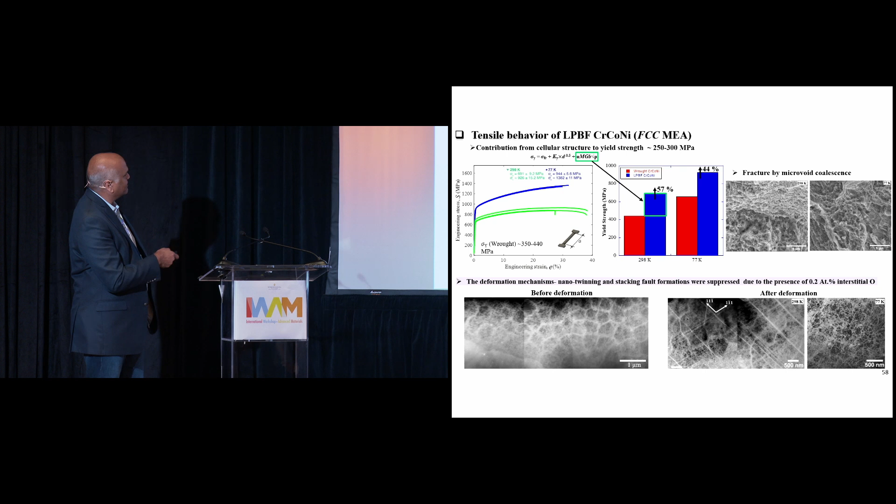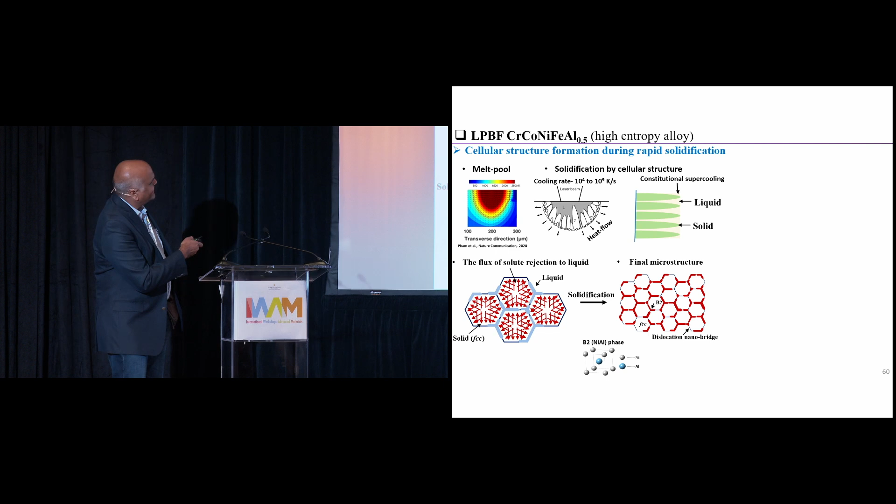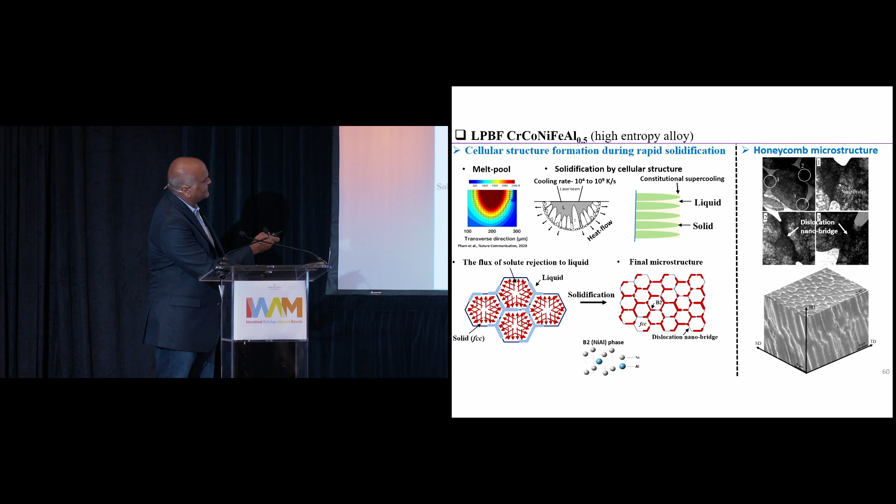Now, we slightly altered the composition - cobalt, chromium, and now added nickel, iron and aluminum. What happens in this case is, you can see these pictures here, there are these nano bridges, which are dislocation structures, schematically illustrated here. So what happens in this material is when you do tensile testing, the strength is much larger at 77 K compared to the conventionally manufactured alloys - there is a 50% increase.

In addition, there is a substantial improvement in fracture toughness. These are the fracture toughness values you can see - at 298, room temperature, it's 306, and even at 77 K, you still have very high fracture toughness, 300 MPa root meters. These are very, very high numbers. If you just heat treat it and get rid of all these nano bridges, obviously everything tanks, goes back to very poor values.

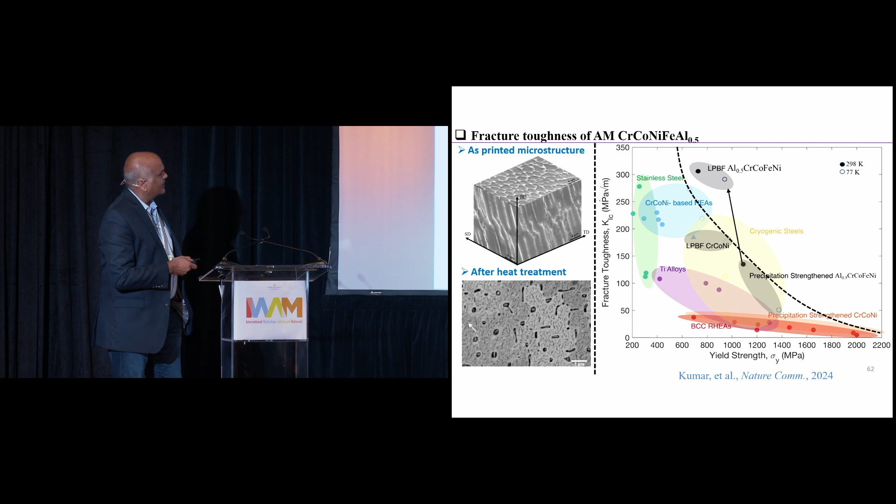So this is where they are. Compared to cryogenic steels and other materials, these 3D printing techniques, which give you these nano bridges essentially, give you very, very good properties. These pictures illustrate these bridges essentially bridge the cracks from propagating and give you very high toughness.

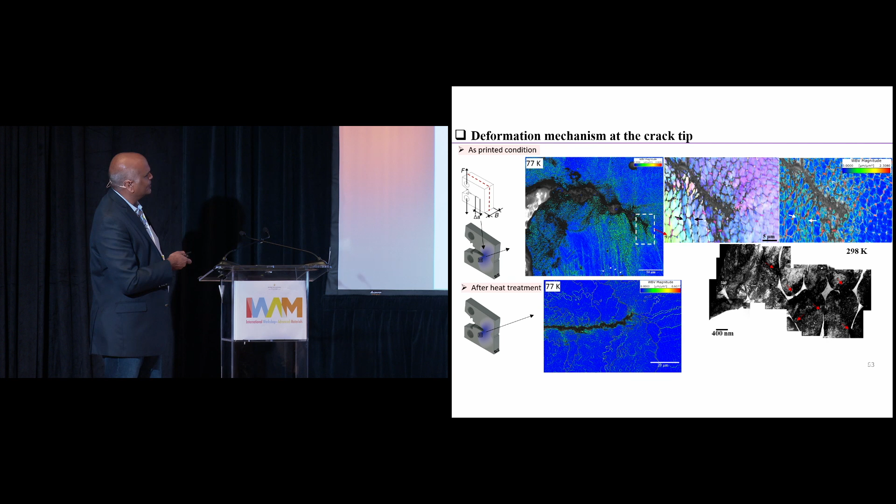All right, my time is up. So what I will do is, there is unnotched fatigue, but I won't talk about this. Let me go to the last slide, hopefully.

Yeah. So hopefully what I illustrated to you is that when you 3D print a metal, which is a bottom-up approach, you get very fascinating microstructures which are hierarchical in nature, a lot of dislocations, etc. We're kind of figuring out how we can control them, and I've illustrated that aspect as well. Because of that, you get unique combinations of properties, both strength and toughness simultaneously increasing, which is very, very good.

Okay, so early on I talked about this processing, microstructure, and mechanical performance connections. For this microstructure, we have to add all these additional features, meso-structures, etc. The thing I didn't get a chance to talk about is the porosity. I skipped on fatigue because that also affects the properties quite dramatically. And because of the rapid solidification conditions, sometimes you can also get metastable structures, and that's another play you have. So the degrees of freedom that you have in terms of microstructural control increase substantially. Because you are printing 3D components directly in like a one-pot synthesis that chemists talk about, you can actually have structural components with bespoke microstructures that are specifically designed for that very purpose.

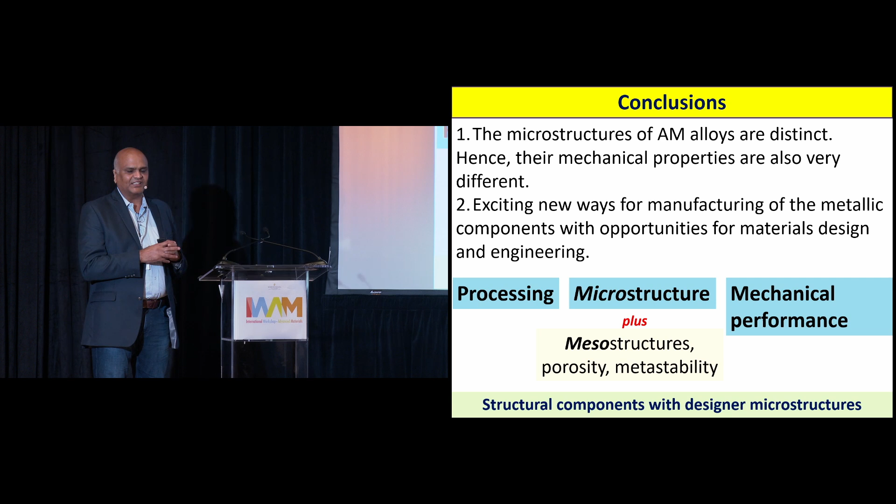With that, thank you very much for your attention.

Thank you, great talk. Any questions from the audience? Anybody? Everybody's probably hungry, Stephen. Yeah.

Thank you, very nice talk. Thank you, I learned a lot, actually. So these so-called high-entropy multi-component metals, actually some of them form glasses quite easily, at quite low cooling rates. So can you make a glass by this 3D printing this way?

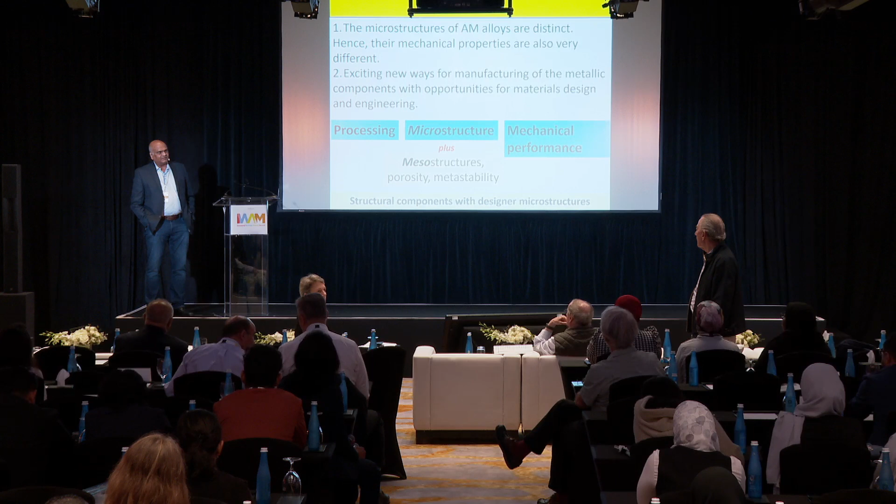I think 3D printing itself will not allow it, because even if you form glasses, they will be metastable, and so they will crystallize rather, after, because of the repeated heating. So if you take good glass formers, the zirconium-based alloys, bulk metallic glasses, if you do 3D print, sometimes they can crystallize. But high entropy metallic glasses is something that people are talking about, and some of the people are investigating it. So 3D printing glasses, I'm not particularly fascinated about, because one of the nice aspects about glass is you go to the glass transition, or supercooled liquid state, and you'll be able to give all kinds of shapes to glasses. You look at your very fascinating perfume bottles; they have great glass forming ability.

I have another point - before I got into this bandwagon, I was doing metallic glass work a lot.

So, okay, yeah. Look, I think anyone in the audience that flies will be grateful that people are doing research on this kind of work for planes. Yeah, and so I always wonder, is this plane going to survive? How many times has it flown? But I guess I'm fascinated by the 3D printing nature. Can you see that being a manufacturing technique that will go into making components for aircraft?

Yes, it will. Yeah, it will go for specific components, it will go in for sure. Will it be generic? So the thing is, most of even advanced metals are very cheap - this is one thing that people have to appreciate, really inexpensive. So I spent a summer at Exxon, and one of these leaders told me, Ram, these pipeline steels, very, very advanced pipeline steels, do you recognize that on a per kilo basis, they're cheaper than sugar? Per kilo basis, advanced steels - this is not just regular low carbon steels. So they will find niche applications and will be used, but one of the things that I skipped is fatigue aspects. So there is a great challenge in terms of certification of these components for long-term use. They are being used in rockets already, but for aeroplanes, still, it's a question. Yeah.